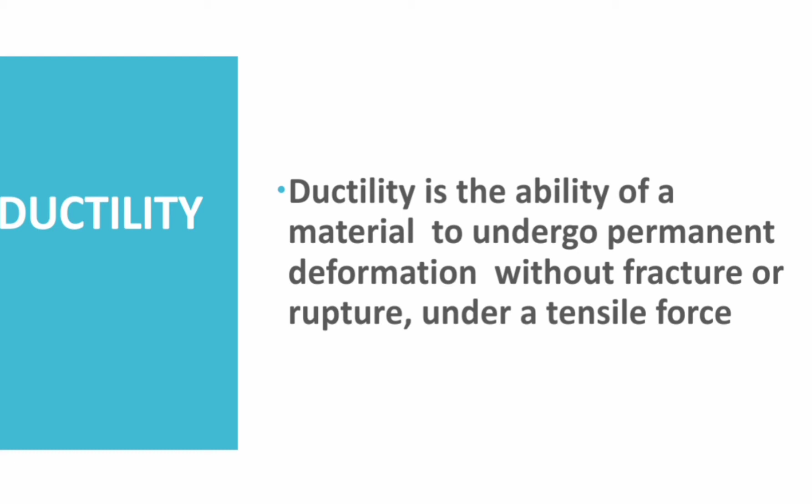Starting with the first topic, that is ductility. Ductility is the ability of a material to undergo permanent deformation without fracture or rupture under a tensile force. In simple terms, it is how far a material can be drawn or stretched into a rope without breakage.

Ductility can be measured in three ways. They are percentage elongation, cross-section area, and cold bend test. By determining the percentage of elongation, that is, determining the change in length corresponding to original length, the ductility of a material can be evaluated. By determining the change in cross-section area before and after application of a tensile force, the ductility of the material

can be evaluated. In the third method, that is cold bend test, the specimen is clamped vertically in a vise and then bent to the horizontal. It is further bent through a 180-degree angle for the subsequent bends. The test is sensitive not only to ductility but also to the specimen diameter. Just understand there are three tests which are used to determine the ductility of material.

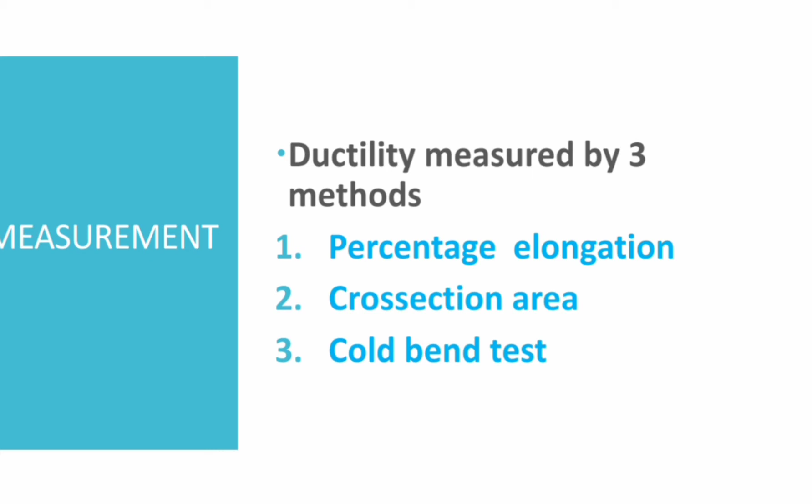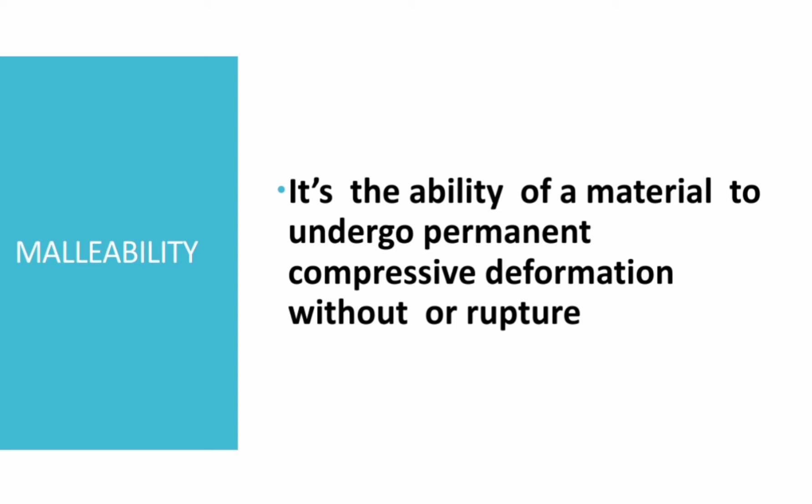Next topic is malleability. What is malleability? It is defined as the ability of a material to undergo permanent compressive deformation without rupture or fracture. In simple terms, it is the degree to which you can permanently deform a material using a compressive force without fracturing it. A material that is malleable can be compressed or beaten into sheet without tearing.

Now, what is compressive load or compressive force? We had explained it in detail in our part 1 lecture video of physical property.

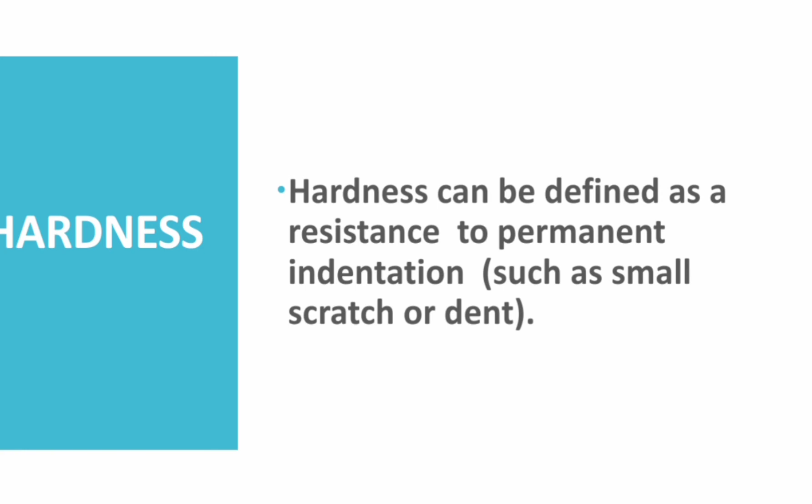Now, a very important topic, that is hardness and hardness testing. This is asked regularly in MCQ, viva and as essay questions also. Now, what is hardness? Hardness can be defined as the resistance to a permanent indentation, such as a small scratch or dent. Hardness depends on the strength of the metal, proportional limit of the metal, ductility, and malleability.

We studied the proportional limit in detail in part 1 lecture of physical property. Please do watch that video.

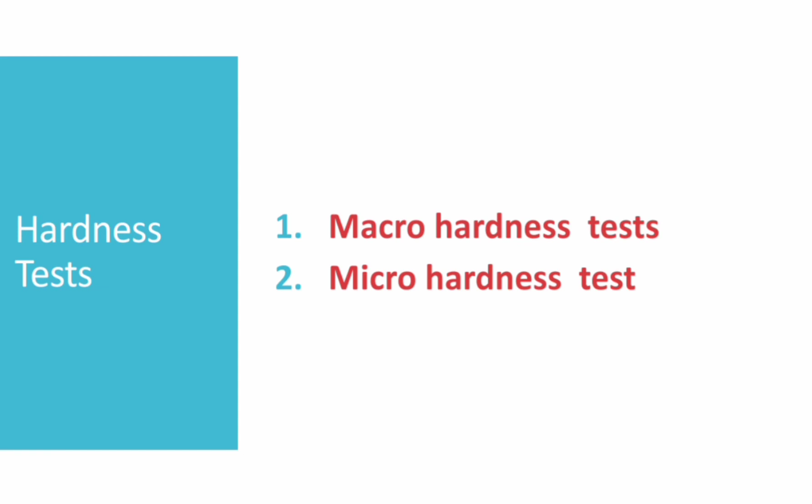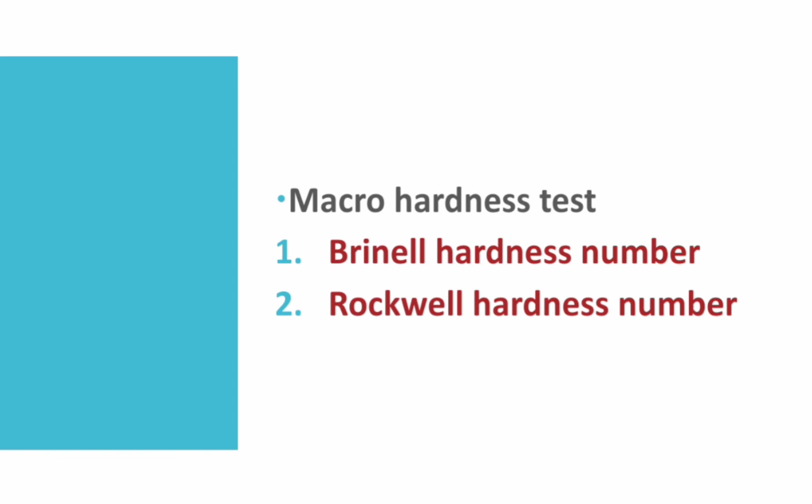Now there are numerous tests to measure the hardness of a dental material. These can be classified as macro hardness and micro hardness tests. Macro hardness tests include Brinell hardness number and Rockwell hardness number. Let me explain each of it in detail. Before that, we can check what will be there in micro hardness test. Micro hardness tests include Knoop hardness number and Vickers hardness number.

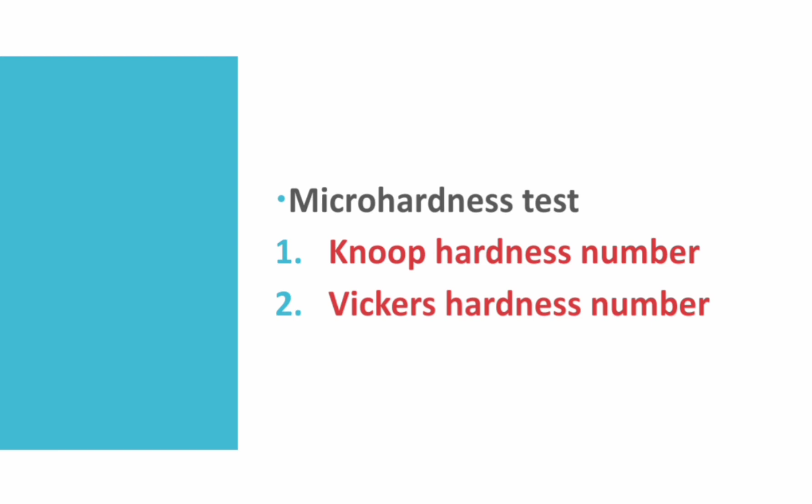Okay, moving to the Brinell hardness number, which comes under macro hardness test. In this test, a known load is attached to a metal ball, or a steel ball specifically. This steel ball along with the load is pressed on the surface or object whose hardness is to be determined. Now what happens when the steel ball is pressed on this object? A round impression is made on the surface of the object. Now the hardness of the object is determined by the formula applied load per area of indentation.

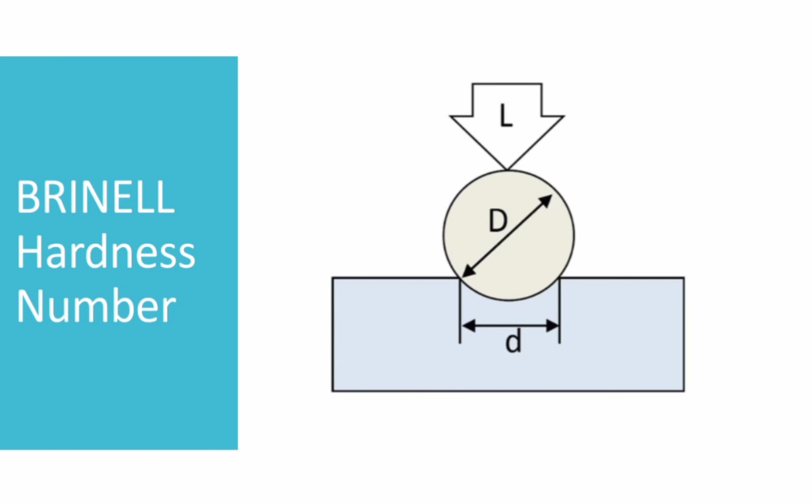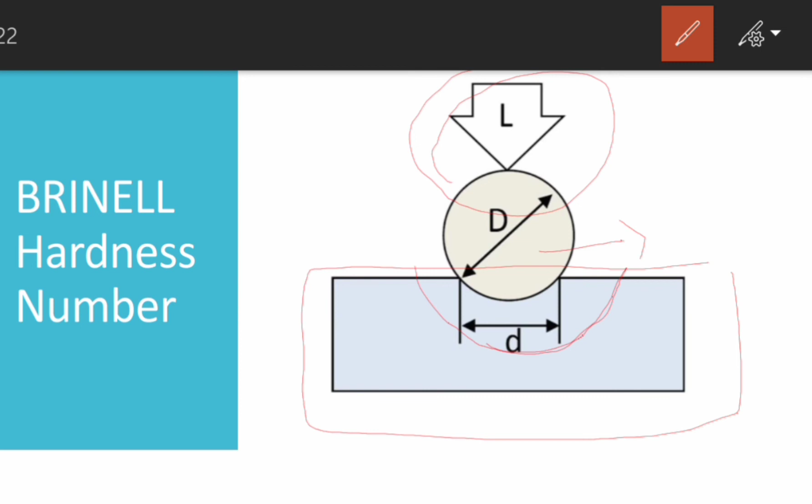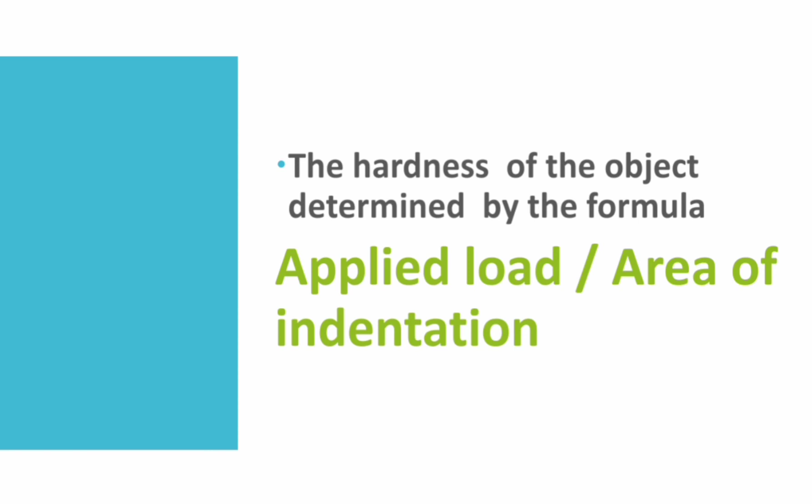In this case, when this load is applied to this metallic sphere, the hardness of the material marked in violet or blue color is determined. An impression is made in this area. And the hardness of the object is determined by the formula applied load, that is already known to us, per the area of indentation or area of the impression made on the material. That's how hardness is determined using this method. This test is best suited for ductile material and is not suited for brittle material.

Moving to the next test. The second test is the Rockwell hardness number. In this test, instead of the steel ball used in the previous test, a conical diamond as shown here is used. A known amount of load is applied to this conical diamond point. When this conical diamond point along with the load is pressed over the object of which hardness is to be obtained, a conical indentation is formed on the object and hardness is measured using this.

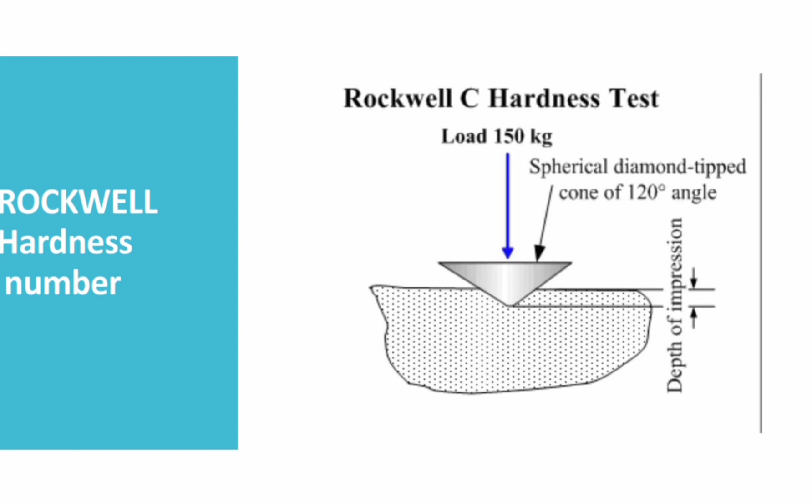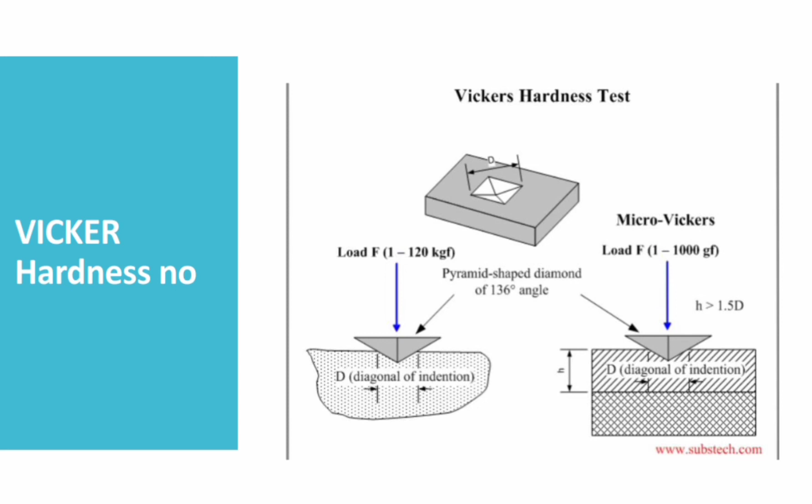Next method is the Vickers hardness number test. This test is similar to Brinell hardness number test, but instead of a steel ball, a diamond in the shape of a square pyramid is used. Now the impression on the object is square instead of circle, and the analysis is made similar to Brinell hardness number, but the diagonals of the square marking are measured and averaged. Please note that Vickers hardness number is also determined by the same formula, that is load upon area of indentation. It is used for determining dental casting gold and not applicable to elastic material.

Now the last method, the Knoop hardness number. In this method, a diamond indenting tool is used. It is equally applicable for hard and soft material. All these tests are very important from the exam point of view. Watch this video repeatedly.